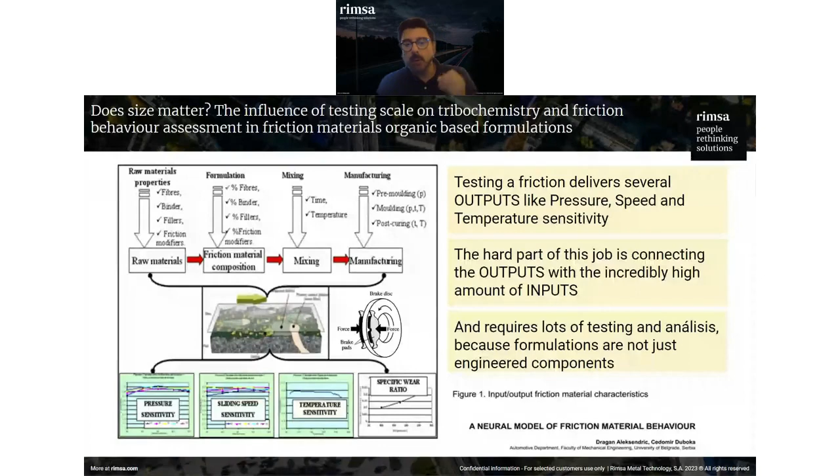Testing this friction material delivers several outputs, like the pressure sensitivity, the sliding speed sensitivity, the temperature sensitivity, the wear ratio. So for coefficient of friction, we want this coefficient of friction to be stable, to be the same in every condition, no matter what the pressure is, no matter the speed, no matter the temperature.

And of course, the hard part of this engineering and scientific work is to connect all this output—which is engineered data—with an incredibly high amount of inputs. On these inputs we have all the raw materials, the friction material composite, the percentage of raw materials we use, the processing conditions and manufacturing conditions, pressure, temperature, finishing, geometry. So it's kind of like a black box when you enter there, and you need a lot of very complex testing, and it's not always easy to understand why things happen, or to answer the question of why something is happening.

This requires a lot of testing and analysis, because these formulations, unfortunately, are not just engineering components. We are not just talking about a component with structural properties that is made of steel and has a geometry. No, unfortunately, this is much more difficult.

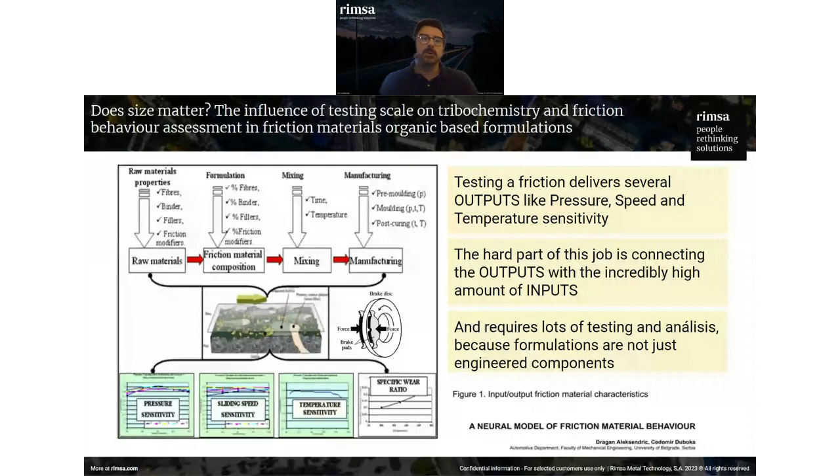During all the evolution of friction materials, the evolution of braking, there have been three drivers, or we may see three drivers right now, that are driving the evolution of friction material. One is the restriction in the use of chemicals, of course. Another is brake emission reduction, and the changes in powertrain due to electrification.

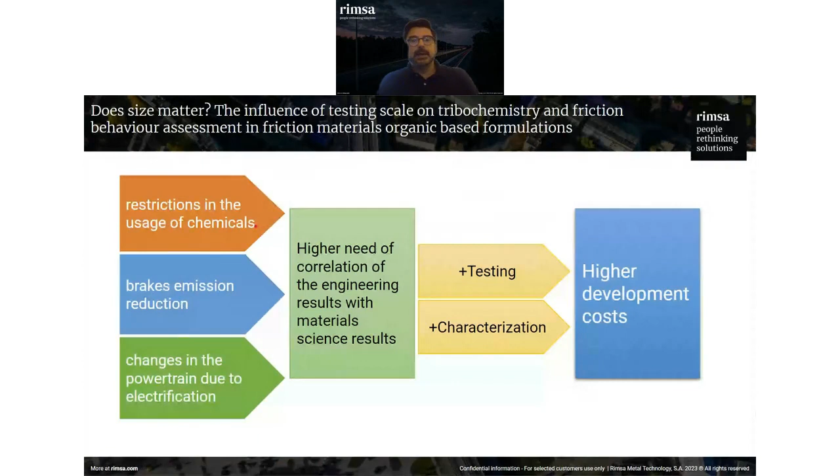All this changes the condition of pressure, of temperature, of speed, and of course, then we are changing some of the inputs. So probably some of the outputs are going to be different. So we need a higher need of correlation between these engineering results and the material science results. This means we need more testing. We need to do not only more testing, but more characterization of what's happened. And this brings higher development cost.

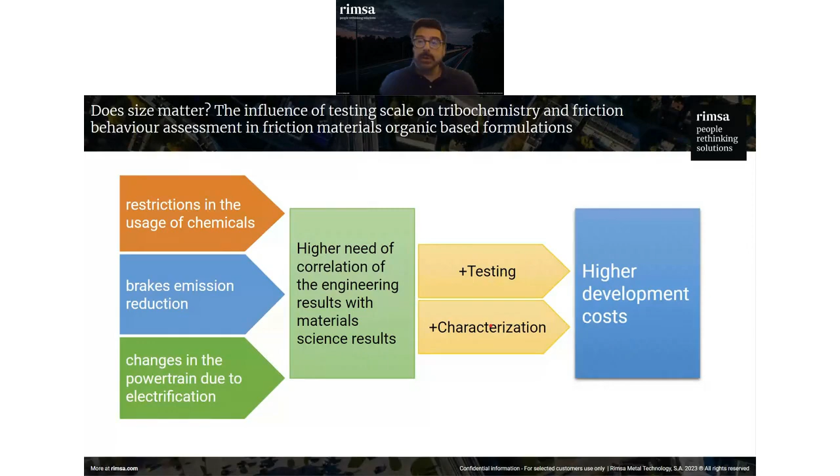In this sector, the big inertia dynamometers are the workhorse of the friction industry, because to get all these outputs with different speeds, with different pressure, with different temperatures, and simulating the inertia of the vehicle, we are trying to stop this kind of equipment that works with a caliper, with the brake pad, and with the rotor, or with the drum. They are the workhorse, but they are expensive, not only to acquire and install, but also to operate, because we need to work with a rotor. There are long tests and so on.

So in the last years, these tribometers, like the one we have, the MFT-5000 from Rtec, are becoming useful tools for R&D.

But we need to understand, and this is very important, how to translate these outputs we get from a tribometer to correlate. If they correlate, the question is, do they correlate with the results we get from a dyno? And this is not only in terms of friction behavior, but also in the tribochemistry. If we are able to reproduce the same tribochemical processes that take place on the surface of a brake pad and a brake rotor - that's why the question of does size matter when thinking about friction and tribochemistry. So today we are trying to give some answers and some clues to this.

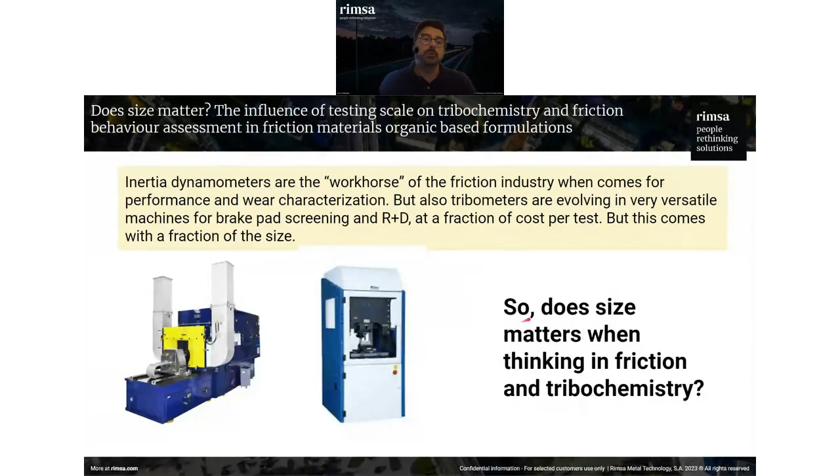This, what you have here, is just an example of what a characterization of a friction material can be. You can see there are different sections. This is a dynamometer test. In this case, it's taken from a J2522 schedule, and you can see how we have different speeds with a fixed pressure, or then we test with different pressures. We test at a specific speed, or we do a number of different stops going at a specific deceleration rate from a specific speed, but increasing the temperature of the rotor, not letting the system cool down.

And we can do this again, increasing the temperature of the rotor and then measuring on these same conditions of characterization, but at different rotor temperatures, or then we can do the efficiency, the effectiveness, at different pressures at this high temperature. As you see, the testing conditions are very complex. The outputs we measure span a wide range of different parameters. So this is important to understand how this correlates.

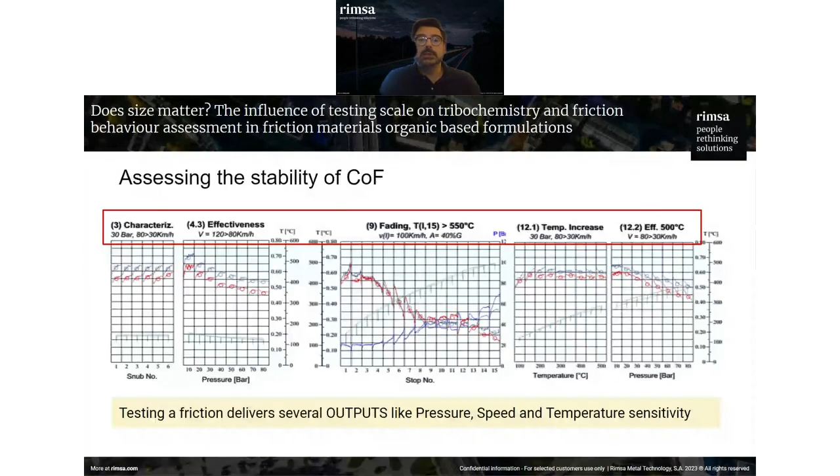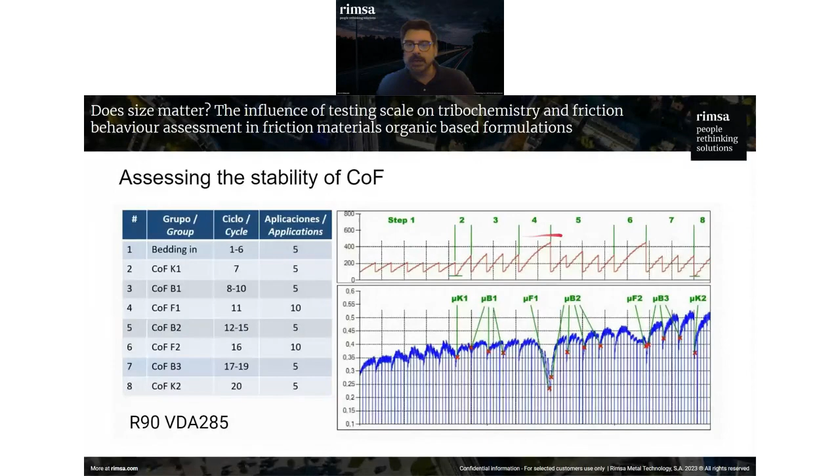In this case, we are going to show initially some results of a much simpler test than this one. Basically it's the R90 VDA 285, which has 8 different sections of testing that go through different speeds, pressures, temperatures, and so on. Here is the profile of the temperature, and this is the response you should have - the response of the coefficient of friction at different temperatures.

Of course, this is very important.

The fact of having not just a pin on disk, but a fully programmable tribometer where we are able to program different speeds, but not only different speeds. We can program different decelerations. So we can simulate the braking, we can simulate the snub, so the reduction of speed, and we can achieve the temperature we need.

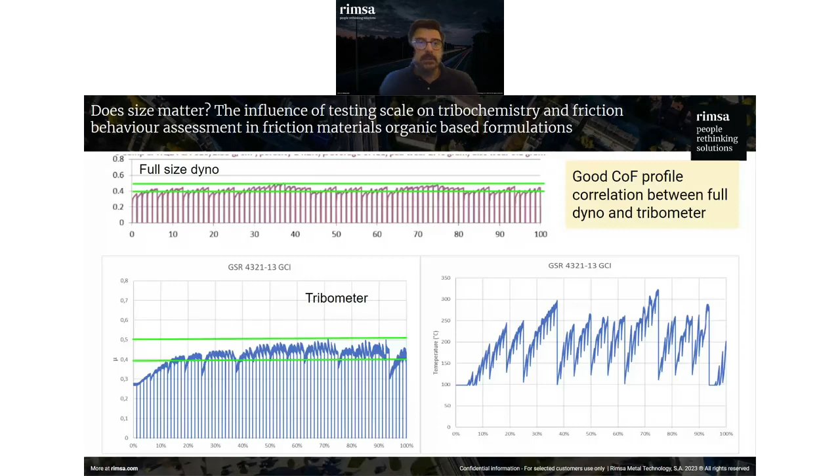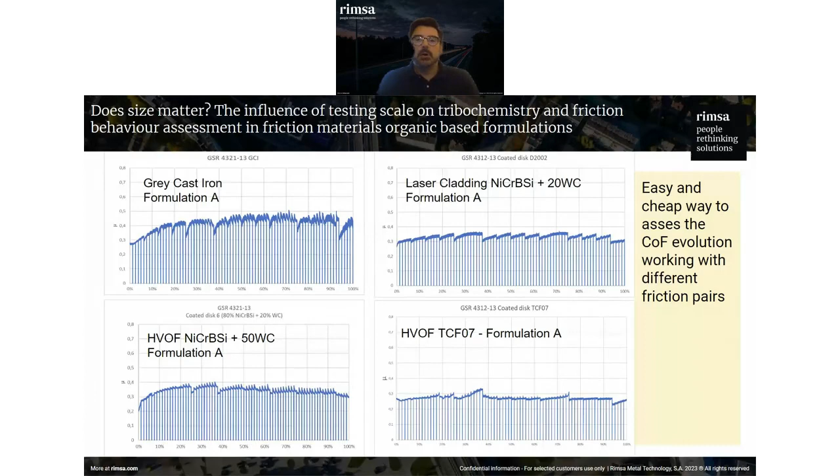Because this change - and you will see later when we talk about tribochemistry - this change, how the surface of the brake pad modifies in every section, correlates with the coefficient of friction we obtain with the engineering data. So this is very important, and having the confidence that we are able to simulate and replicate these coefficient of friction profiles in a tribometer allows us and the friction community to have an initial assessment at a lower cost and a higher speed.

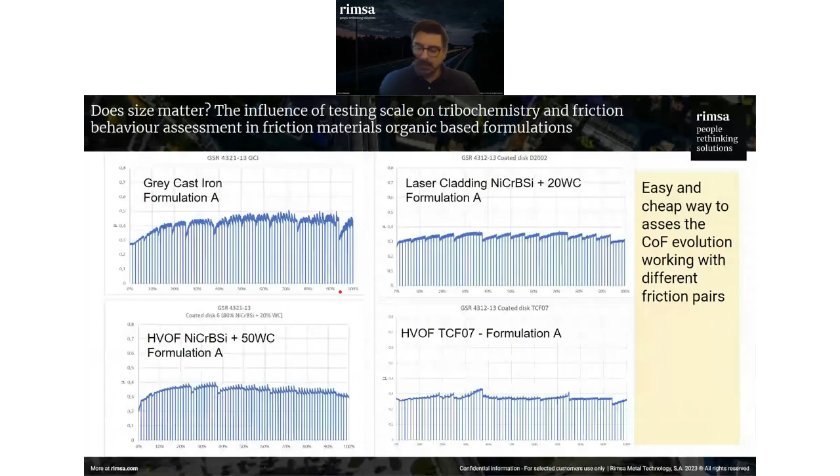So this gives you a lot of flexibility to work with small samples, but having the confidence that the profile you obtain will be close enough to the one you are going to obtain on the dynamometer. And this is the same case if we use a different formulation, or we can compare different formulations with different rotors.

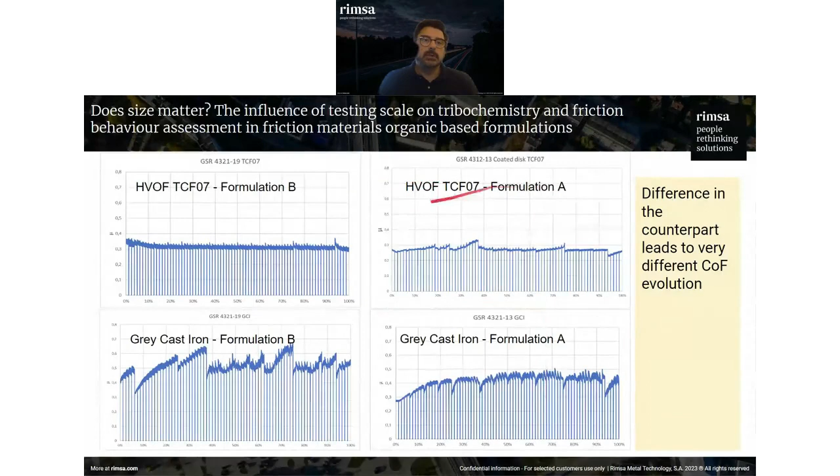We have here a hard-coated rotor with titanium carbide and with a formulation B. And you can see how formulation B with the same rotor behaves in a different way, and how it compares with a gray cast iron. This is completely different - a gray cast iron versus a hard-coated rotor.

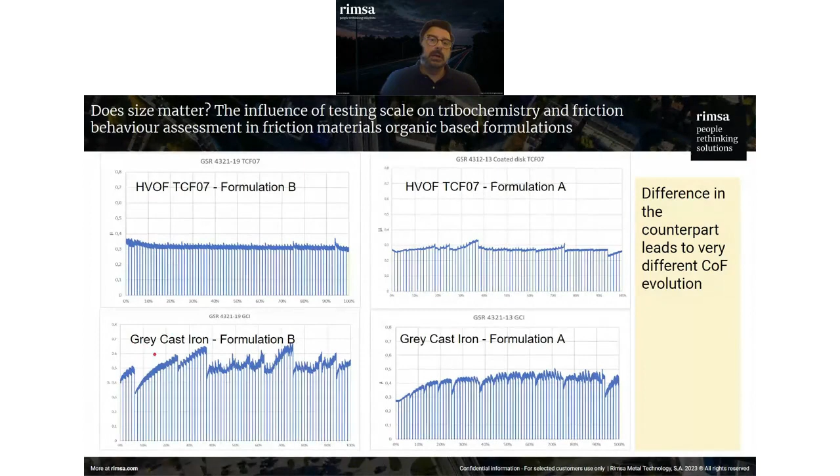This is one of these trends right now, going for emissions. Emissions regulations implementing the reduction of emissions in brake pads is making the industry test and try to implement some coatings on the rotors. Something that may not be working with traditional materials like gray cast iron may be working when you work with coated rotors. So this kind of tool, the tribometer, gives you an easy way to simulate and go through an initial screening.

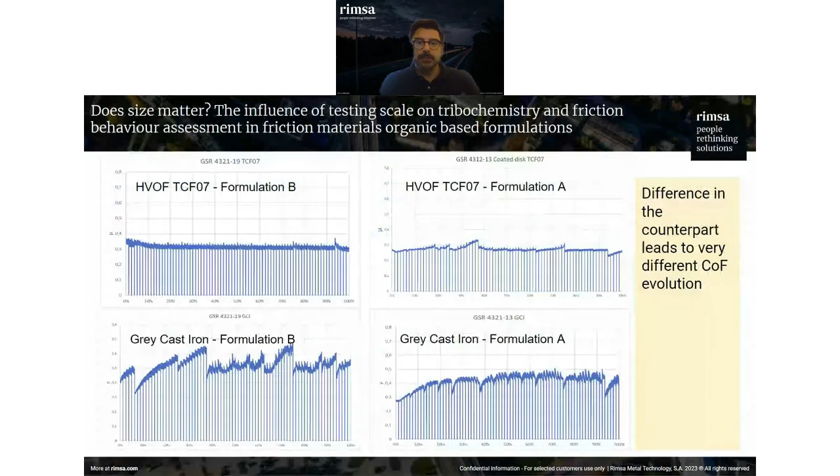These are the engineered results. But the important thing for us with a tribometer and a dynamometer is to understand if we really have the same tribochemistry. And what is tribochemistry?

Tribochemistry relates to the mechanically initiated chemistry - chemical reactions that take place in the boundary layer, and the process involves the formation of a film on the contact surface. This is very important for friction materials. Organic friction materials are commonly like a phenolic resin matrix, a polymer that includes a huge amount of different kinds of additives, minerals, metals, and different charges.

And of course, as you have seen, this is reaching up to 500, up to 600 degrees of temperature on the rotor. So phenolic resin degrades starting from 400 degrees. So we have a lot of phenomena there related to the degradation of the phenolic resin and how the debris generated from this contributes to the coefficient of friction stability.

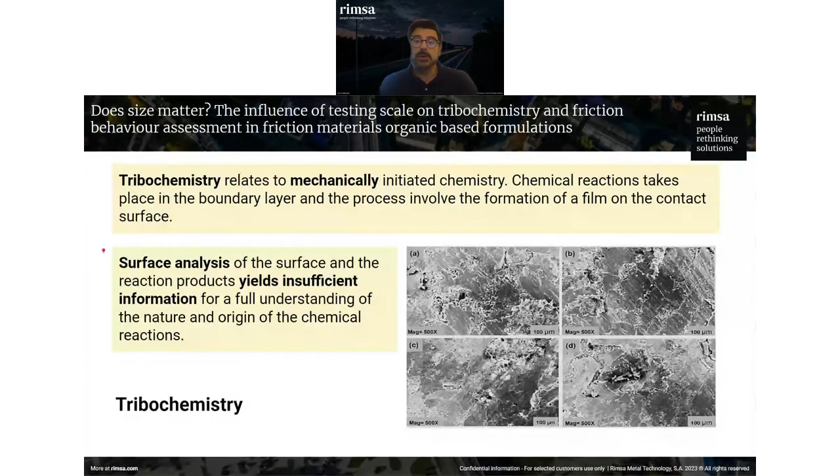So this transfer film - if we take the cross-section of a brake pad and look at the working surface, we usually find this kind of tribofilm. This is related to the tribochemistry, the mechanically induced reactions that take place on the surface of the rotor and the surface of the brake pad, and how this debris is incorporated, kept, or released from the surface of both parts.

So it's very important for the tool we use to assess the coefficient of friction and to do the research that it is able to replicate this tribochemistry in the same conditions, or in close conditions, to the ones we are going to obtain in a big measuring machine or testing machine like a dynamometer, or in the car.

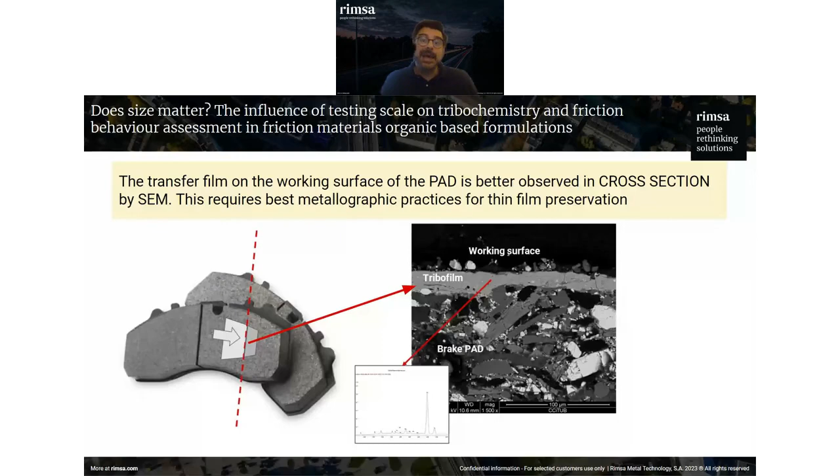What we are going to obtain in the curve. So these results we are going to show you, it goes in this direction. This tribofilm can be of different types.

These are different cross sections of some work we have done, and of course these transfer films basically, when we are working with conventional friction materials and conventional cast iron rotors, usually there are these transfer films that we found can be of 4 types, let's say.

3 of them are based on iron oxide. This iron oxide usually came from the rotor, from the oxidation of the rotor, and then it builds up this transfer film. We can find what we call the loose transfer film, with big particles of iron oxide and other debris that may come from the pad.

We have what we call the compacted transfer film, so with more iron oxide, very small nanometric iron oxide debris, with a very long residence time in the third body layer, and that are stacked here.

This can be the mixed transfer film, so we have some areas that are compacted debris, some areas that are loose debris, and we may have also the possibility of not having any transfer layer on top of the brake pad. Sometimes, depending on the formulas, you don't get this thick or thin transfer film.

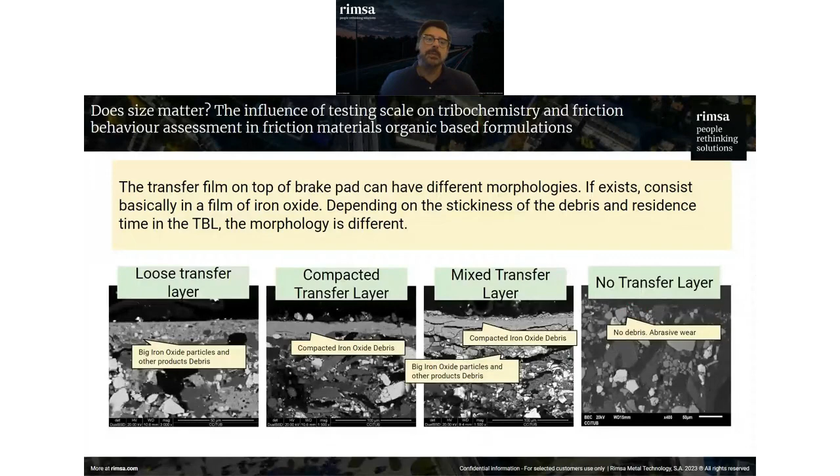So tribochemistry also happens not only on the surface, but also beneath the surface. We may have some additives, some chemicals in the composition, like the phenolic resin, or other additives that may be reactive to the environment where the friction takes place.

In this case, one important additive of this type are the sulfides, for example. Sulfides are used in friction materials to stabilize the coefficient of friction at high temperature and to reduce wear. But you may see here how a sulfide usually reacts with oxygen, and every sulfide has a different temperature of reaction.

In this case, we are showing some results of the iron sulfide, and the iron sulfide reacts with oxygen around 400 degrees. You can see here how after testing on a dynamometer, the signal of sulfur has gone in these first 200 microns beneath the surface.

So to some extent, this iron sulfide has been reacting beneath the working surface and has become iron oxide. If this happens on the dynamometer, it's very important that this also happens on the tribometer, and make sure that this happens on the tribometer, or pin-on-disc, or whatever lab scale tool you use.

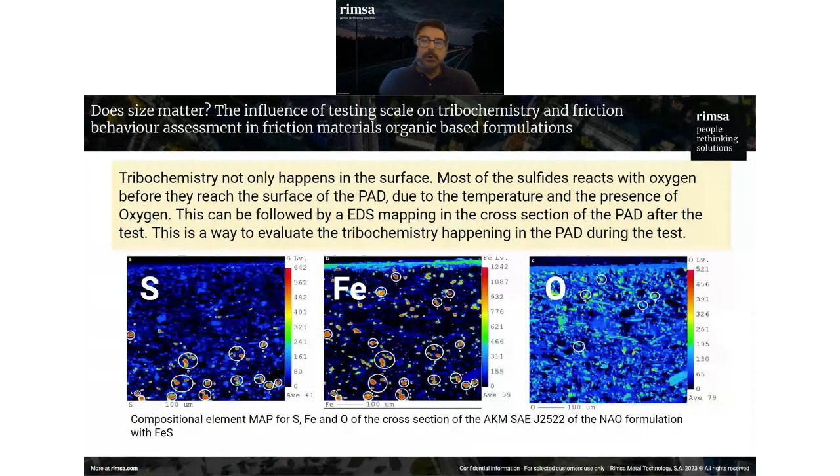To assess a friction material, in order to guarantee that the results we are getting from the coefficient of friction, from the engineering results, are going to be easily correlated with the results we may obtain from a big testing equipment like a dynamometer. So you are going to see a brief comparison with a formula.

In this case, we are going to use the sulfides as a marker to follow up this reactivity beneath the surface or on the surface of the brake pad, and we'll compare what happens in a dynamometer, with a friction material tested in a dynamometer, versus the same friction material tested in a tribometer.

For this, we are going to use 2 different sulfides as a marker. One will be the iron sulfide, and one will be a composite sulfide that is a core of iron sulfide with a coating of tin sulfide.

This is something that happens between 400 and 600 degrees, in the presence of oxygen, of course. Instead, this composite, we call SF05 — you see the TGA, the DSC — the reactivity starts at around 450 degrees with the oxidation of the iron sulfide, takes place up to 700 degrees, and then we have the oxidation of the tin sulfide to tin oxide. So two different oxidation profiles, two different temperatures where this oxidation takes place.

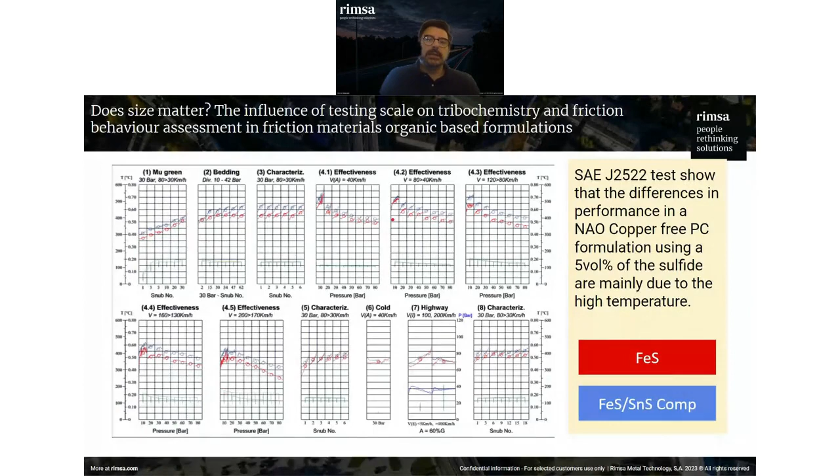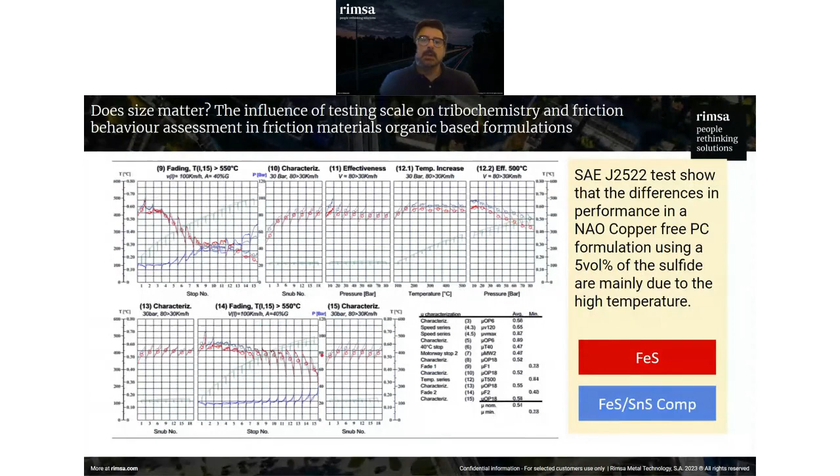We see that the difference in coefficient of friction — these are the results of the full-scale dynamometer, so this is the real test — it's not really different, especially at high temperature. The response of using the iron sulfide or the composite in this particular formula, the engineered results is basically the same. So we have basically the same coefficient of friction.

The difference is if we measure the wear of the brake pad after this test on the dynamometer, we see the wear in millimeters happening at 150 degrees, at 300 degrees, and at 400 degrees. When we use this composite, this iron tin sulfide, we have lower wear at high temperature compared with the pure iron sulfide.

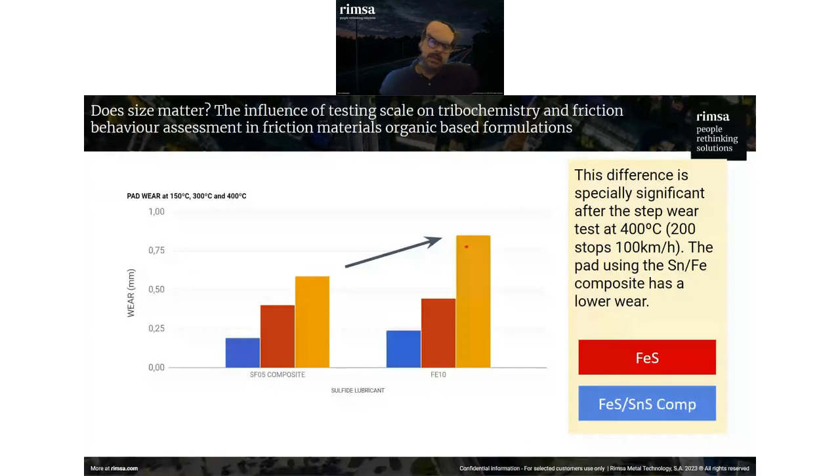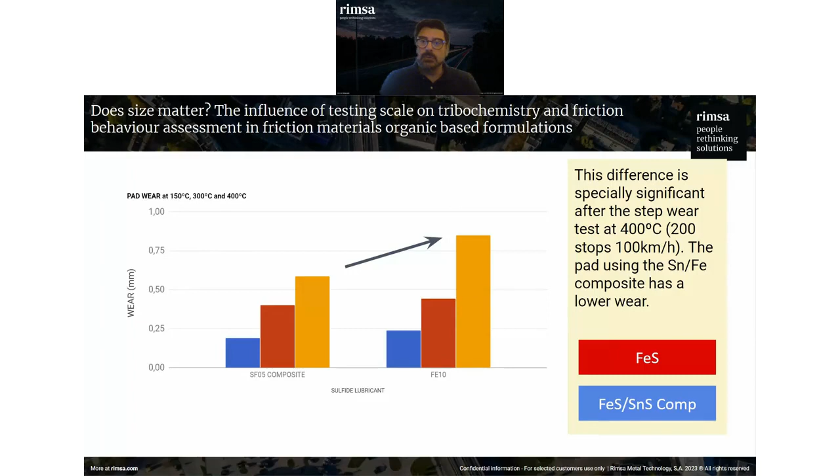When we use this FeS, the wear is higher. Why is the wear higher? That's probably related to this tribochemistry, and is probably related to the oxidation of the iron sulfide at high temperature. We are getting iron oxide, we don't have the iron sulfide anymore at high temperature, so we're not getting this effect of lubrication or wear protection of the sulfide at high temperature.

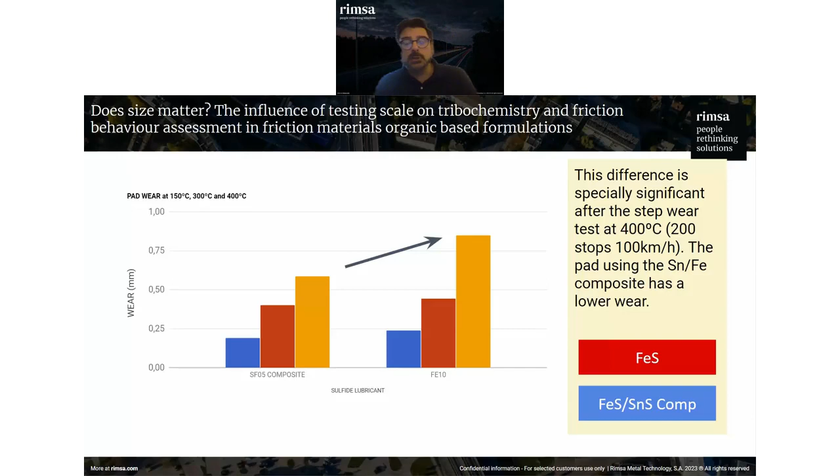But how to assess this, and how can we follow if this is happening in the dynamometer or the tribometer? We have done a simple test to follow that. You are going to see the different charts. Right now, all the red ones are always from the dynamometer and the green ones came from the tribometer.

So we have assessed - sorry, this is a mistake here - this is around 10 square centimeters. This is the brake, the coupons we mount on our MTF. So what you get is 10 square centimeters of friction material that are tested against a rotor that in this case is gray cast iron, the same that we will use in the dynamometer.

And what we have done is a process of 200 stops at each temperature - in this case 150, 300, 400 degrees - under conditions of 30 bars of pressure, going from a speed of 100 kilometers per hour to 0 kilometers per hour, a complete stop, and a deceleration rate of 0.4 g.

And we are going to see how the coefficient of friction evolves and the tribochemistry evolves, both in the dynamometer and the tribometer. So basically, this is a summary of what we have gotten in the four tests.

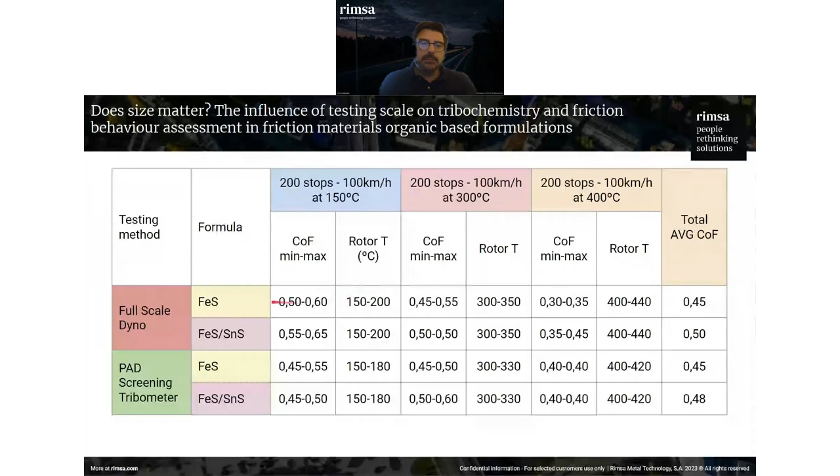So we measure basically the coefficient of friction and the temperature we have achieved at each level. You can see on the full-scale dyno this is the rotor temperature, the temperature on the counterpart, on the cast iron rotor surface. So we have achieved slightly different coefficients of friction and slightly different temperatures, but they are close enough to be considered in the same range.

So the total average coefficient of friction - we see the same trend. The average coefficient of friction increases a little bit when using the composite sulfide compared with the iron sulfide, and this is the same case both in the full-scale dyno and the pad screening tribometer.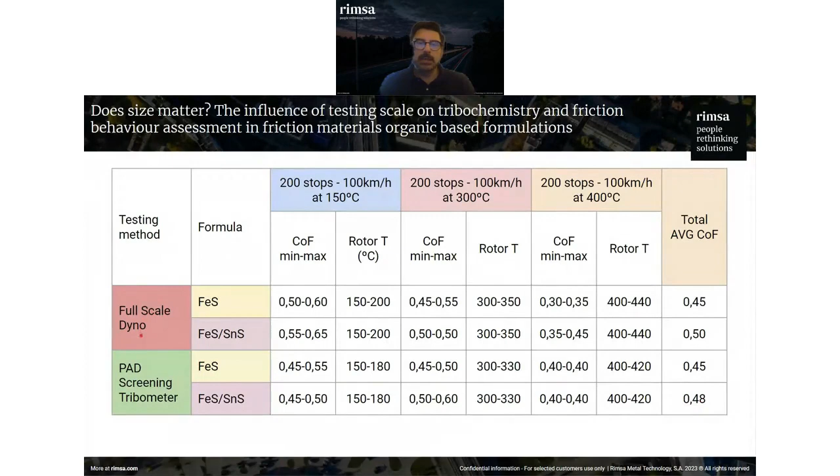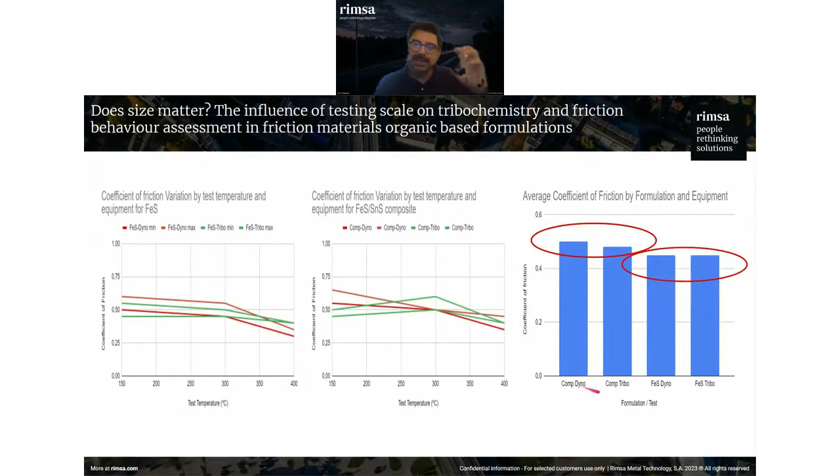You will see here in a more visual way, this is the evolution of the coefficient of friction in the dyno and in green in the tribometer, and here is the average of the coefficient for each temperature. So we can see that in the dynamometer, when we compare the different sulfides, we are getting the same trend as in the tribometer.

Okay, and if we go into the detail of how the coefficient of friction of the friction material and the rotor evolves, we will compare here the results in red of the dynamometer, the full-scale dyno, with the results in green of the coefficient of friction evolution on the tribometer.

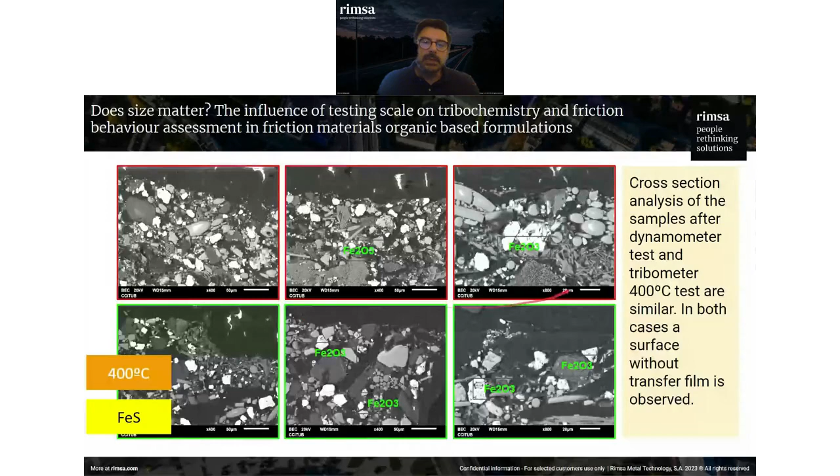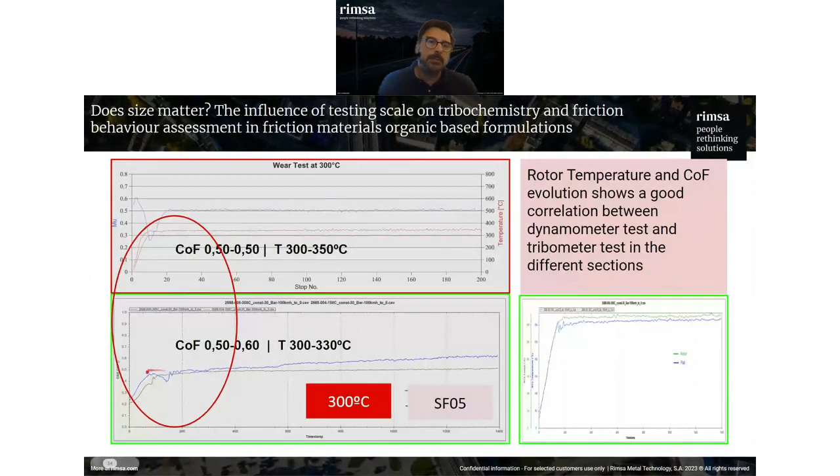So we are able to replicate this oxidation in the same way in the dynamometer and the tribometer. If we see the results with the composite of iron and tin sulfide at 150 degrees from the dynamometer and the tribometer, we have a close profile of the evolution of the coefficient of friction. At 300 degrees we see a difference, but still we have this small drop - here the drop is bigger, but then the coefficient of friction is pretty close. And at 400 degrees we have a slight difference in this initial area. With the tin sulfide and iron sulfide, the correlation is not as pronounced or as clear as with iron sulfide alone, but still we get a close result.

And if we go to analyze the elemental map distribution on the surface after the dynamometer or the tribometer, we see here that there is no oxidation, neither on the tin sulfide, nor on the dynamometer or the tribometer. If we analyze this with SEM, we find that the particles of the sulfides are still giving the signal of tin sulfide and iron sulfide, both in the cross section after the full scale dyno or the tribometer.

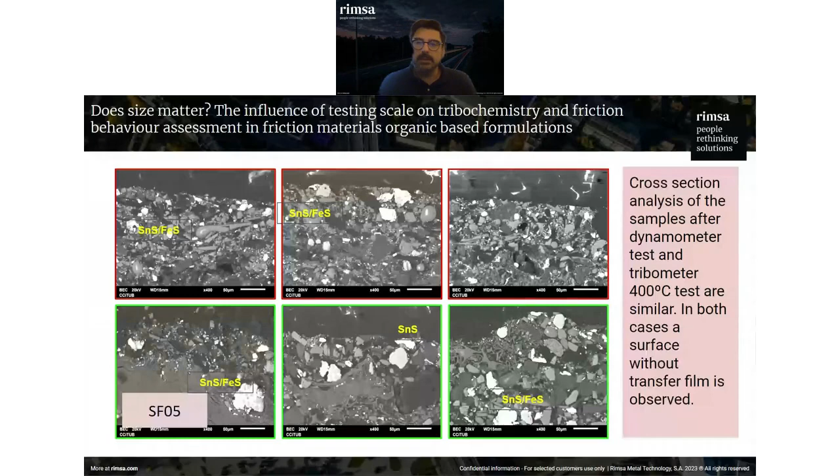So we can correlate. We can say that we are obtaining the same coefficient of friction profile because we are sure that we are keeping the same tribochemistry. We are able to replicate this tribochemistry that takes place beneath the surface.

As a summary of these results, with the full scale dyno, neither in the iron sulfide formula nor in the iron sulfide tin sulfide formula do we have any pad transfer film type, because this formula doesn't generate a transfer film. And the oxidation, after this 400 degree test, the oxidation depth achieved by the iron sulfide is around 200 microns, both in the full scale dyno and the pad screening tribometer. We don't have any oxidation of the composite of iron sulfide and tin sulfide, neither on the full scale dyno nor on the tribometer.

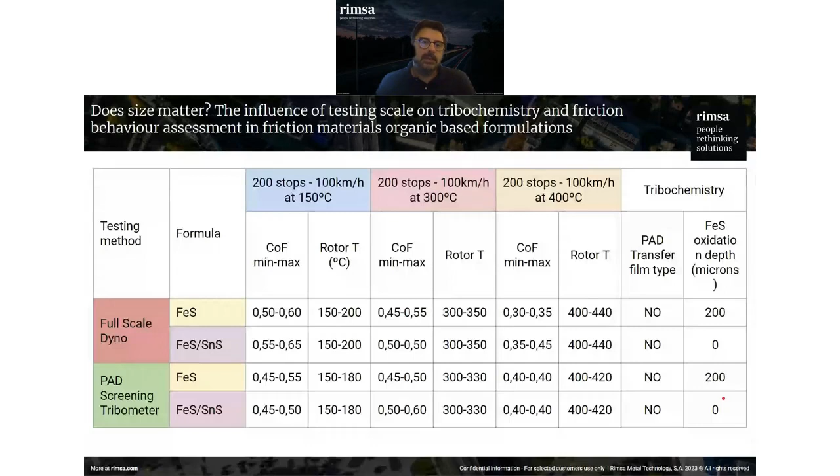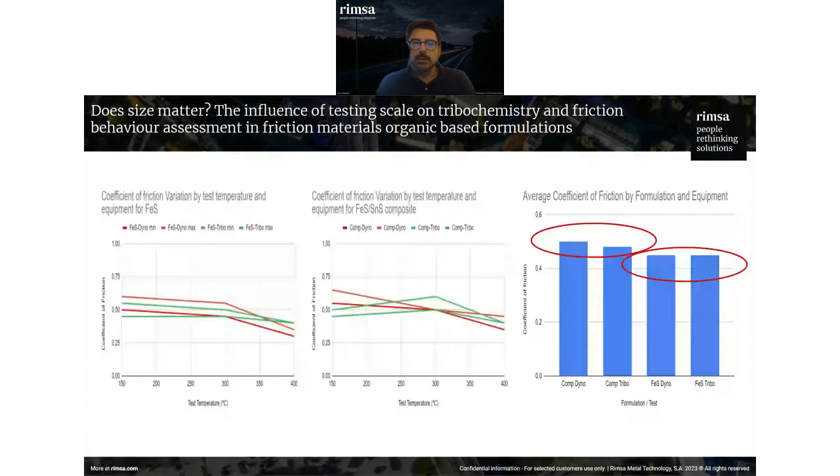Remember that the oxidation of the iron sulfide in the composite, because of the structure, was not happening very fast at 400 to 600 degrees, but started at a higher temperature and ended at a much higher temperature.

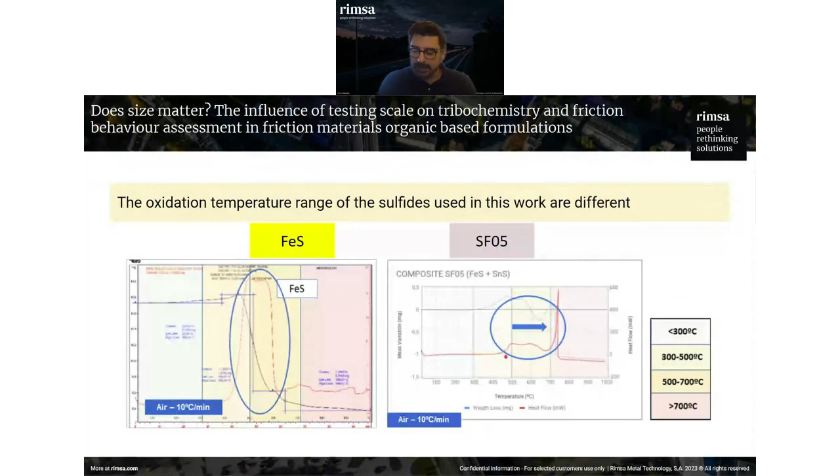And with this, we are going to finish, and we are going to go to the main conclusions about this: if the size of testing is important for friction materials.

It's true that testing, as you have seen, involves an incredible amount of inputs we may have, and the outputs we need to measure in very different conditions. This makes testing a friction material still very much required to validate how a friction pair behaves in working conditions. And this increases the development cost, especially when radical changes in formulation happen.

If we are in a transition, like electrical vehicles that work in different temperature conditions or with different corrosion behavior, it increases the needs of testing.

So in this scenario, pad screening tribometers are developing themselves as a new tool to reduce testing cost and speed up development cycles, because of their low running costs and easy setup. A test that takes hours or days in a full dynamometer, because you need to cool down in each session, can be sped up in a tribometer. So all the mass involved in the testing and the cycle is much shorter in order to run the cycle.

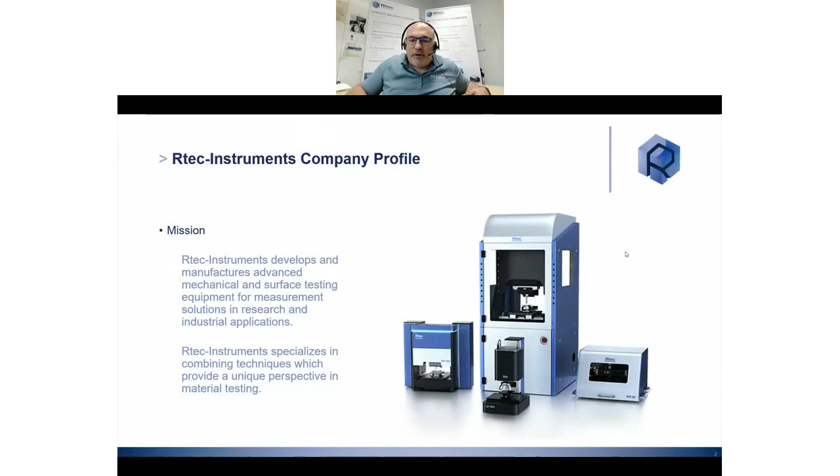Rtec is a US-based company, and we are developing and manufacturing advanced mechanical and surface testing instruments like scratch, tribo, and two roller testers. I will show you later some slides. We are a US-based company in San Jose. I'm in fact based in Switzerland on the European base of Rtec. We have offices in India, China, and Japan, and we use sales partners.

We are proposing multi-functionality tools. What we want to do is offer the possibility with our tool not to do only one analysis, but to combine a lot of technology and measurement characterization. In the past we started with wear and friction by tribology. After that we had scratch testing, we added indentation, and also a 3D microscope linked to the system for roughness and topography. We also added spectral reflectance for coating thickness and optical constant. All these tests can be combined on the same tool at the same time, and with this product we can learn much more than only doing one test.

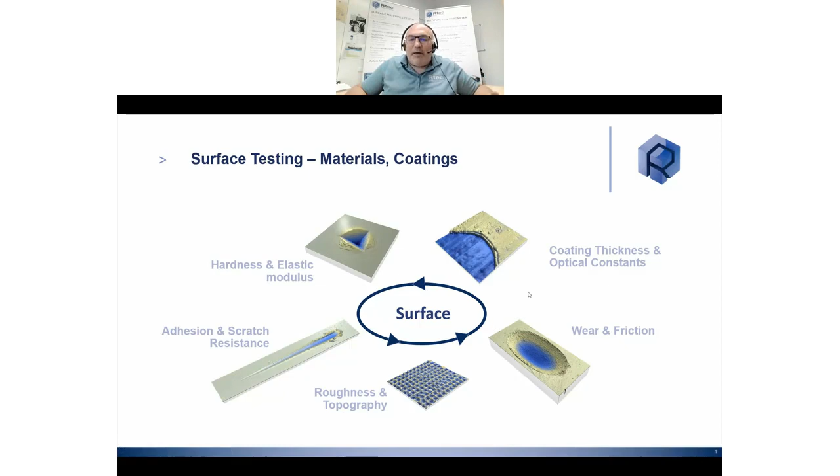The main product line of Rtec instrument is multifunctional tribometer for friction and wear. We have three different types of instruments: MFT 5000, 2000, and 3000, depending on load and options. We have an SMT 5000 for scratch and indentation testing for hardness, elastic modulus, adhesion, and scratch resistance. We also have a full range of fretting testers, from 5 microns up to 2.8 millimeters, with frequency going up to 300 hertz, mostly for small displacement. As I mentioned, we are also developing our own universal profilometer head to analyze all our data and surfaces.

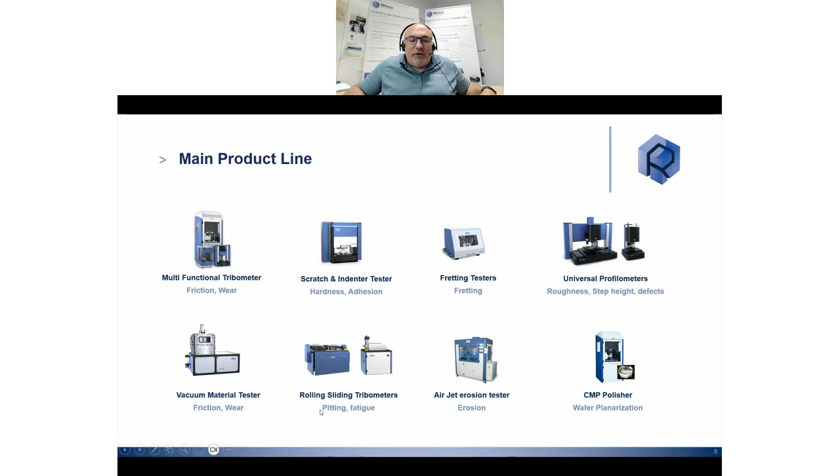We have a vacuum materials tester. We can do tribology, tension, and scratch testing in vacuum, but we have the same tool for high pressure, for compressor applications for example. We have rolling and sliding tribometers, two roller and three roller, for pitting, fatigue, etc. We also have an air jet erosion tester and a CMP polisher.

The main topic today was the multifunctional tribometer, so I'll move fast through the MFT. We propose a wide range of tribometers, and with our tool we can apply from less than 1 milliNewton up to 10,000 Newton with our MFT 5000. We have different motors, harmonic drive, fast motors going from 0.001 RPM to 10,000 RPM. What is very important, especially for brake testing, we now have a different motor going up to 60 Newton meters at a speed of 2,300 RPM, offering a lot of possibility to test with high torque. All our tribometers are very modular — on the same system we can use rotary drive, reciprocating, block on ring, disc on disc, ring on ring, and a lot of other configurations.

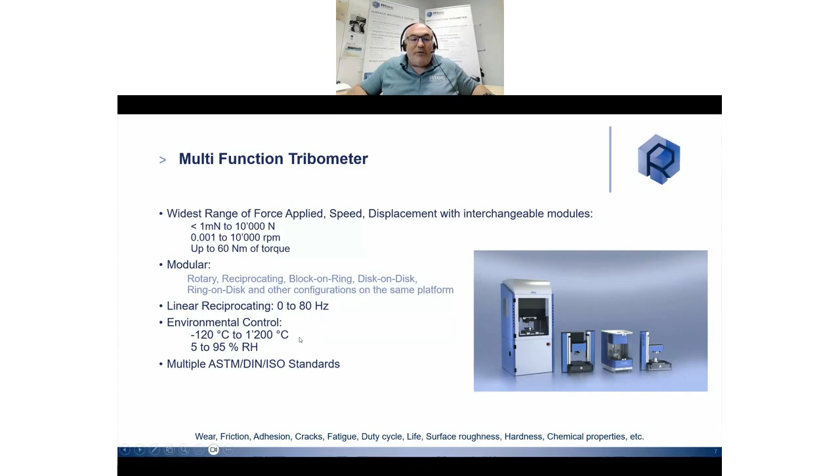We have a linear reciprocating going from 0 to 80 hertz of frequency. Naturally, a lot of environmental control for minus 120, and we can go up to 1,200 degrees. And we have also some humidity chamber to go from 5 to 95% of humidity.

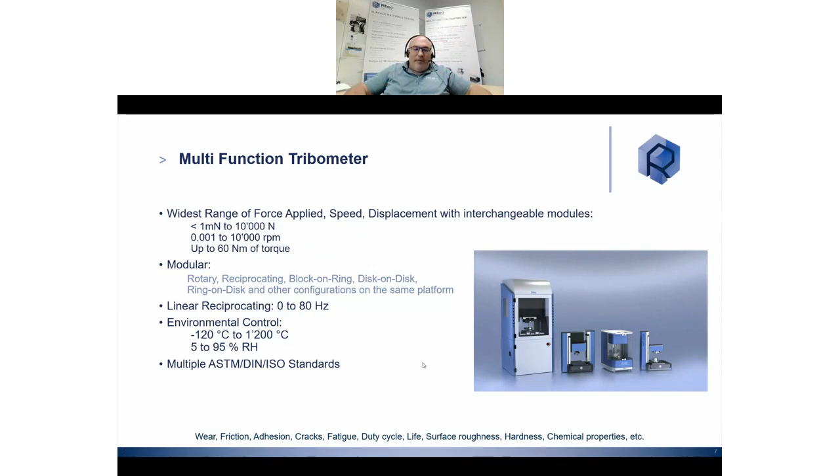Naturally, all the tool, and Carlos explained well before about the SAE standard, we follow a lot of multiple ISO, ASTM, and DIN standard. We choose a base, MFT 5000, 3000, 2000, depending on the final load we want to use and all the mode. After we choose the machine, maybe we have a rotary, linear, long stroke, block on ring, fretting, or upper rotary drive. We choose the environmental condition from salt spray 500, 1000, minus 120, minus 60, or 1200. And we combine all the options on the same tool. What is also very important is the fact you can start with one option and add options every year, every 2 years, every 5 years, in order to have more and more capability with your tool.

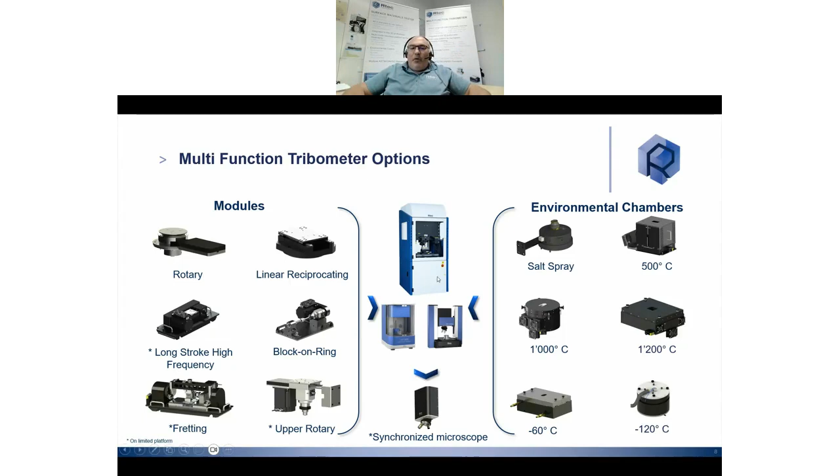The idea to have something new with tribology was the fact we combined 3D profilometry with our tool. And for example, here we have a reciprocating wear test.

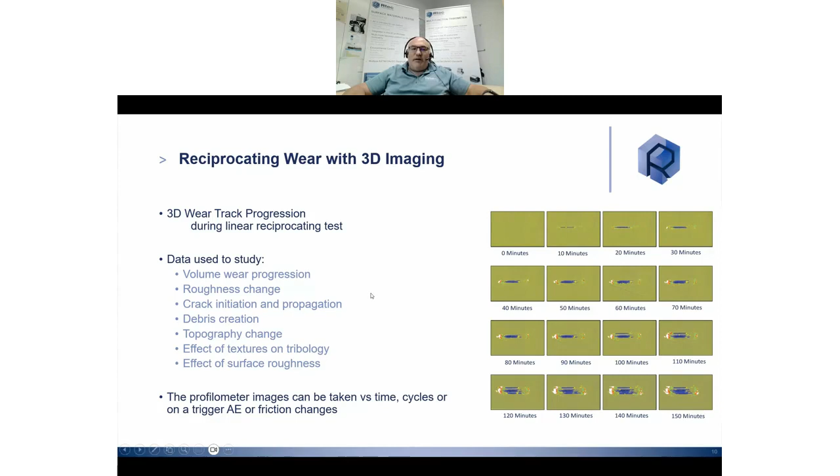We are testing some steel materials, and we decide to take a picture of the stroke every 10 minutes. And you see 0 minute, 10, 20, 30, and we took an image automatically synchronized. It means you start with your linear reciprocating test, you move back to the microscope, you come back and you restart the test. With a 150-minute example here, we can measure the volume wear progression, we can measure the roughness change, we can check if we have crack initiation, debris creation, topography change. It gives you much more possibility than basically doing 150 minutes directly and analyzing at the end the full test.

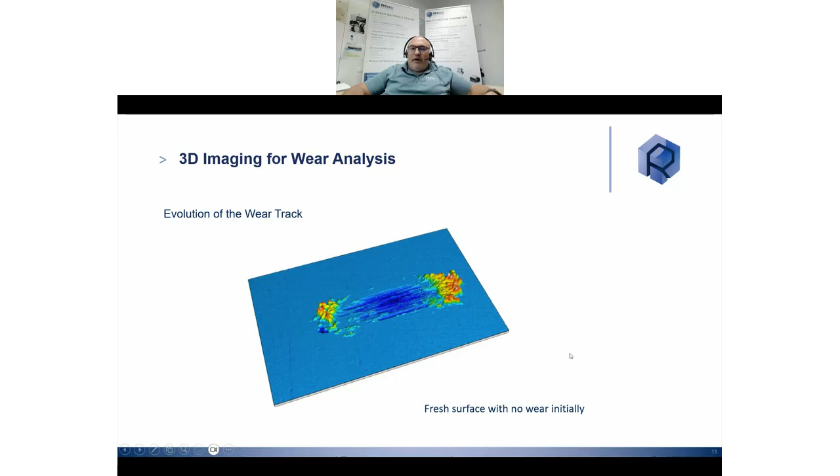You see here the increase of wear during the 150 minutes, and with the debris, with the large wear, from where it's coming, do we have hard particles? We can check really the lifetime. We can do multiple profiles in order to understand the wear rate every 10 minutes and combine it on a curve to have a really related test for wear rate.

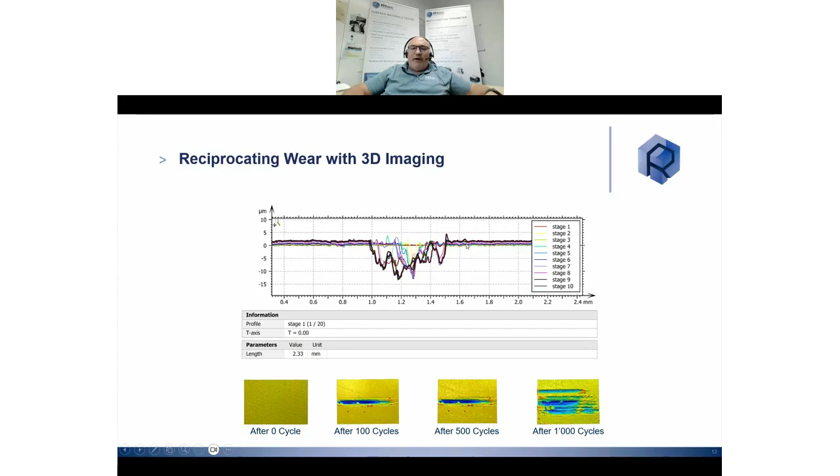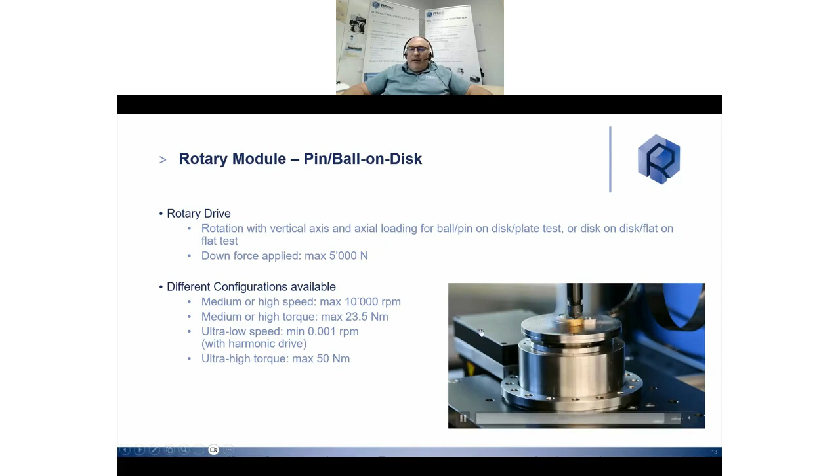As I tell you, Carlos showed a demonstration with special pads with 3 coupons on the rotary drive, but we can also do basic pin on disc, ball on disc. We have a rotary motor. We can go to high speed. We can go to 5,000 Newton if needed. We have high torque, slow speed, and we are doing this type of test quite often.

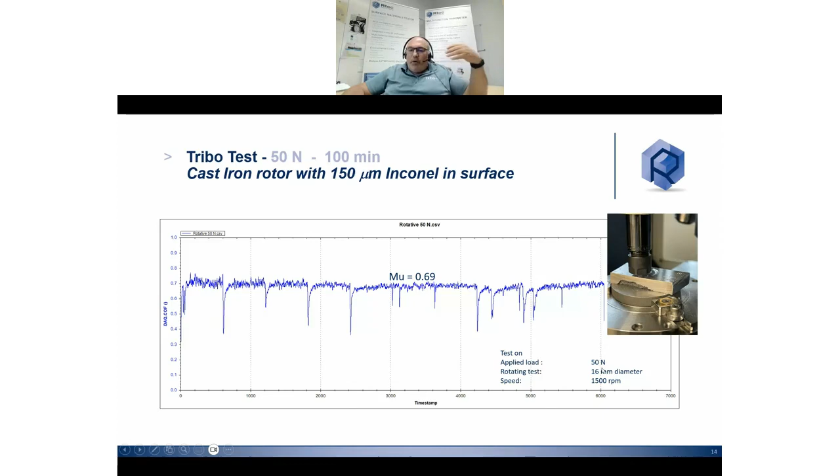As an example, you see here it's a cast iron rotor with 150 micron of Inconel on the surface. We cut really a rotor. In fact, we fix it on a metal plate and we are doing our rotation. And during the rotation, you see we have some decrease of friction every time - it's when we cool down because we move to the microscope. We have a friction coefficient at 0.69. We apply 50 Newton with a 16 millimeter diameter. It's really ball on disc on this type of rotor with a speed of 1,500 RPM.

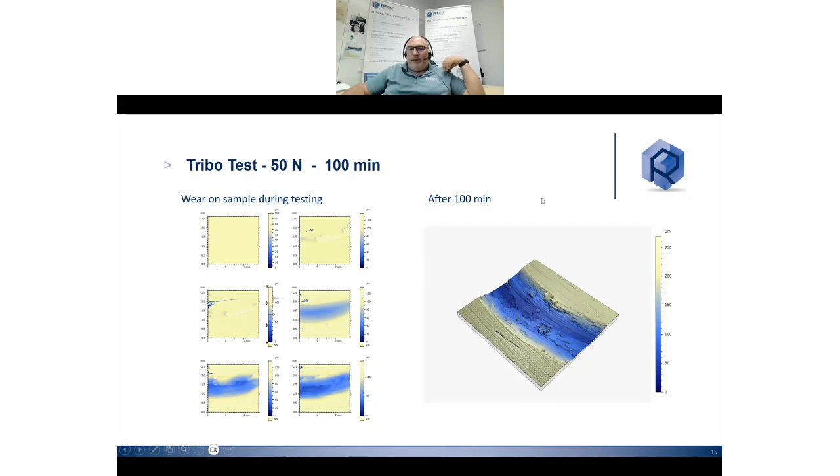And here you see clearly the increase of wear during the test and the final wear at the end of the test. And this one helps you to understand clearly what happened in rotary mode.

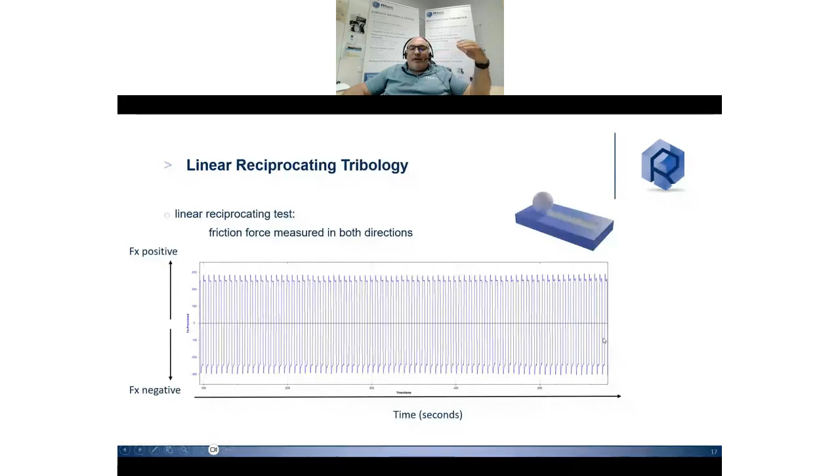And this one, again, if I show you a small application, if we are doing linear, we measure with linear reciprocating both directions, meaning the friction on positive and friction on negative. And it allows us to do naturally some curves of the displacement in function of the friction.

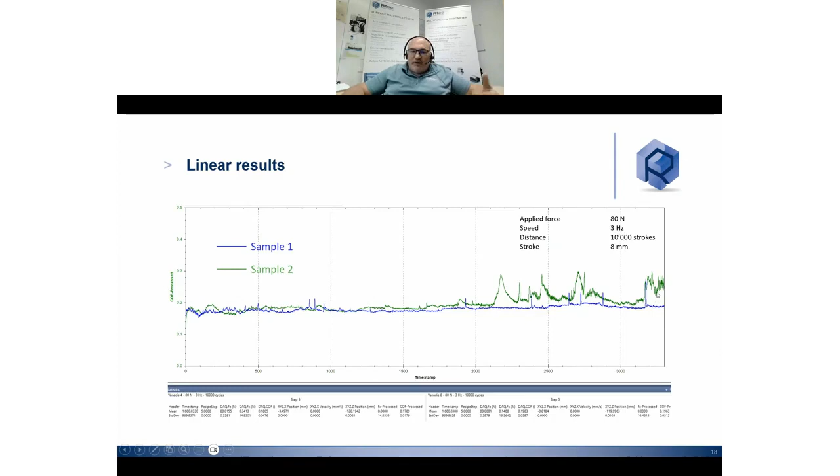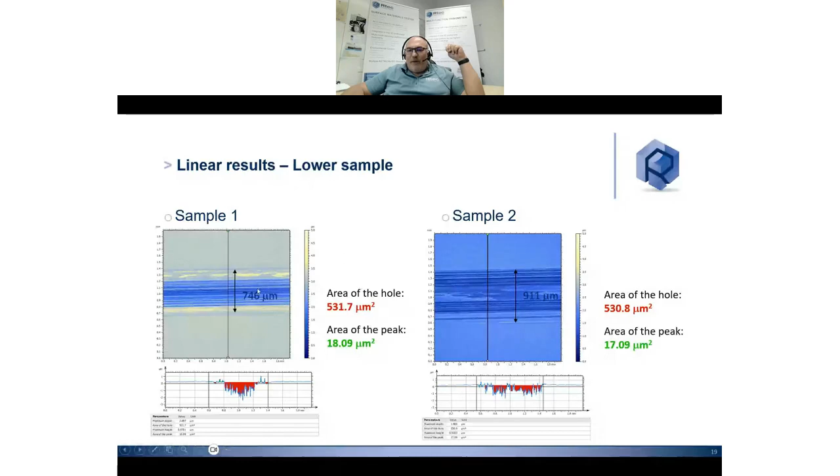Again, after the end of the test, we just scan the surface. We can compare. You see here the two materials have the same trend, except maybe at the end, the green one, sample 2, has more friction. But when you compare the wear scar at the end of the test, you see we damage much more in terms of depth on sample 1, but much wider on sample 2, simply because it's harder and we break much more, we wear much more the ball during the test.

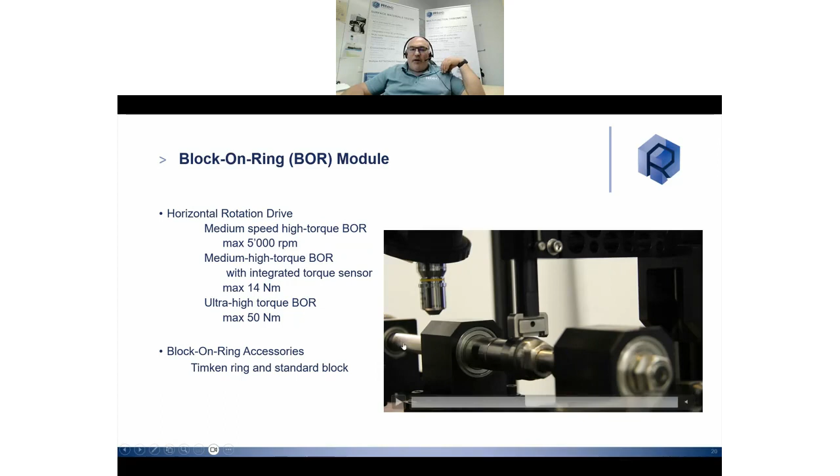We can also add the option for block on ring, which is another direction - we turn horizontally and apply a block. We can go up to 5,000 RPM, with a torque inside the motor of up to maximum 50 Newton meter.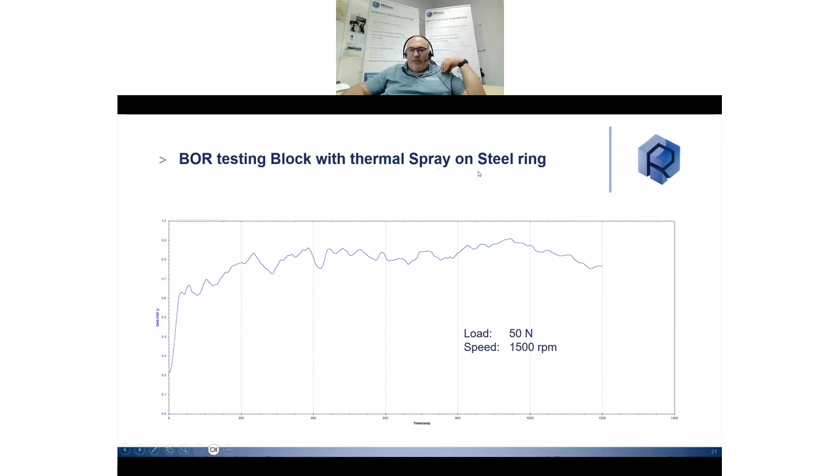Again, some curves showing the friction as a function of time on a thermal spray on steel ring with 50 Newton load. A big advantage of our MFT 5000 is the possibility to put an upper rotary module.

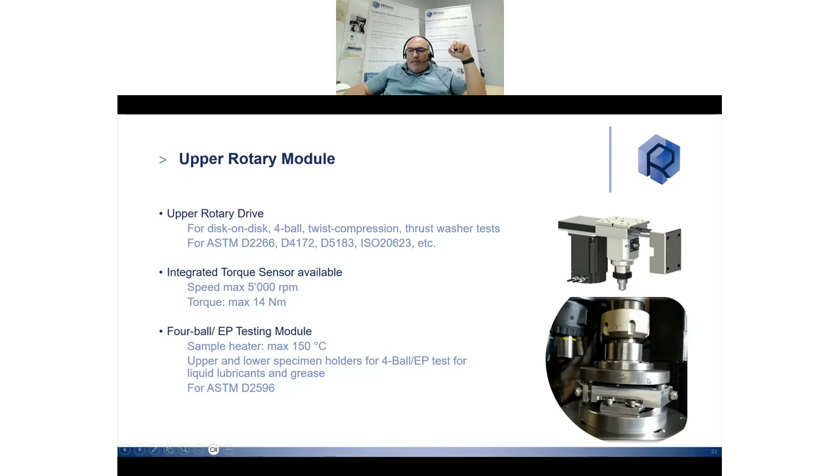We are really unique in this functionality. With an upper rotary drive, we can do disc on disc, 4-ball, twist compression, thrust washer, a lot of testing. We can go up to 5,000 RPM with a max torque of 14 Newton meter. The idea is to block the lower part in order to control differently the temperature environment.

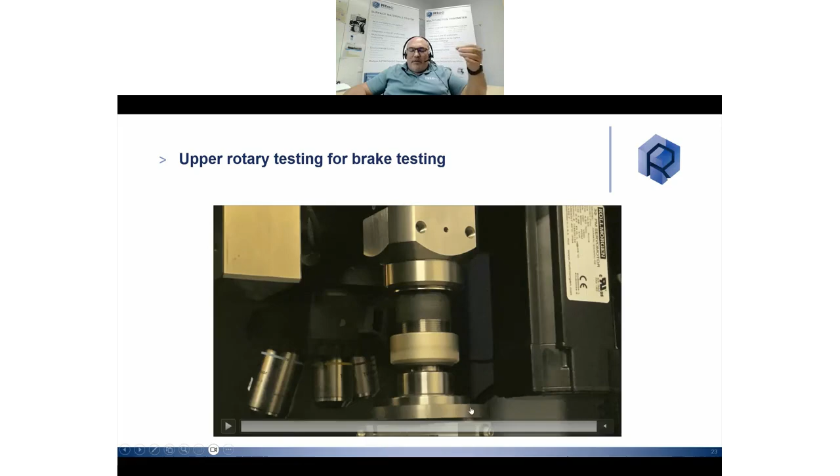You see a small video: the upper drive is turning, it's a rotor, and we press on the brake coupon fixed on the lower part. Automatically, we move to the microscope, scan the surface, come back, and restart our test. Fixing the brake pads on the lower part allows you to analyze much more deeply the coupon during the test.

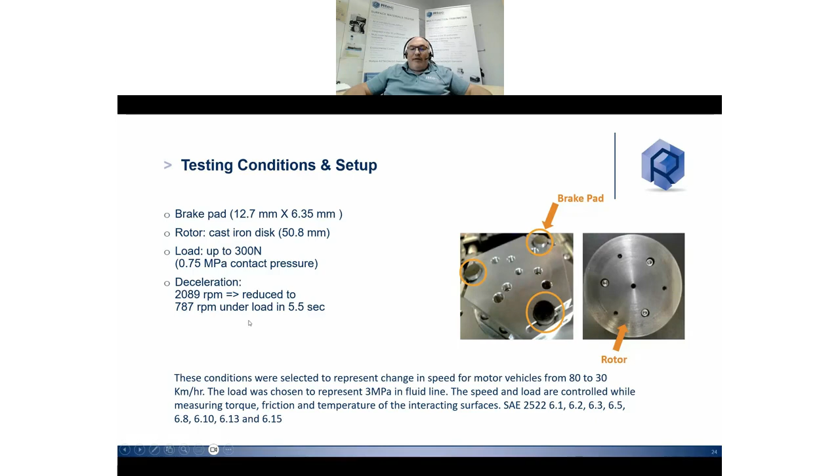Here is a test we did with a coupon of 6.35 millimeter diameter, a cast iron disc. We go up to 300 Newton as the diameter of the brake pads was a little smaller, and we reduce from 2089 RPM to 787 - a deceleration from 80 to 30 kilometers per hour - in order to understand what happened with the materials.

At the beginning we don't have so much defect, but it increases during the test - we are removing material and changing the topography of the sample. We can do that because we have the upper rotary drive linked with a 3D microscope.

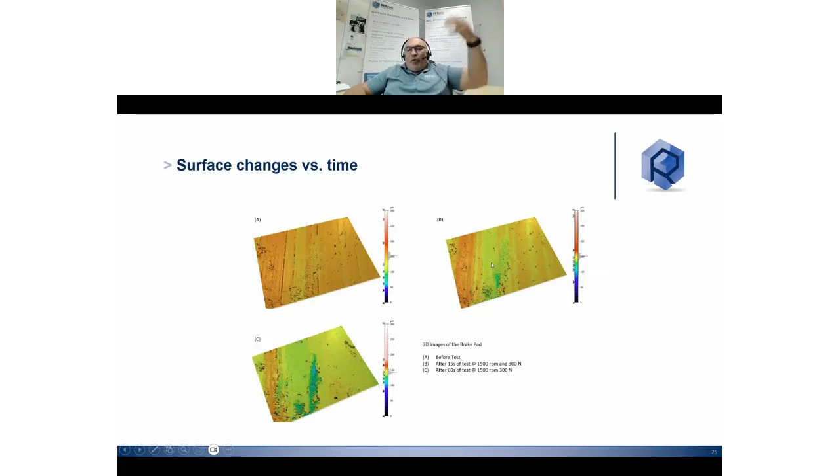We also have an important possibility: the ability to scratch with our head or with our upper loading cell. We can do nano, micro, macro scratch testing, and we can add sensors like acoustic emission, electric contact resistance, or temperature sensor.

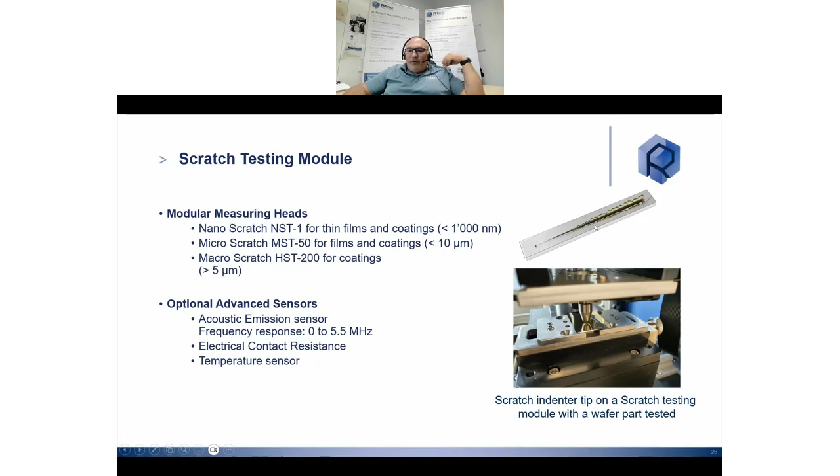But you can also do scratch hardness testing. With scratch hardness, you scratch at a constant load and measure the width of the scratch. If you divide the load by the residual width, you get, following ASTM G171, the scratch hardness. It's a direct comparison with Vickers hardness, except it's much more statistical since it's not measured at one point. Here's an example - a 10 millimeter scratch.

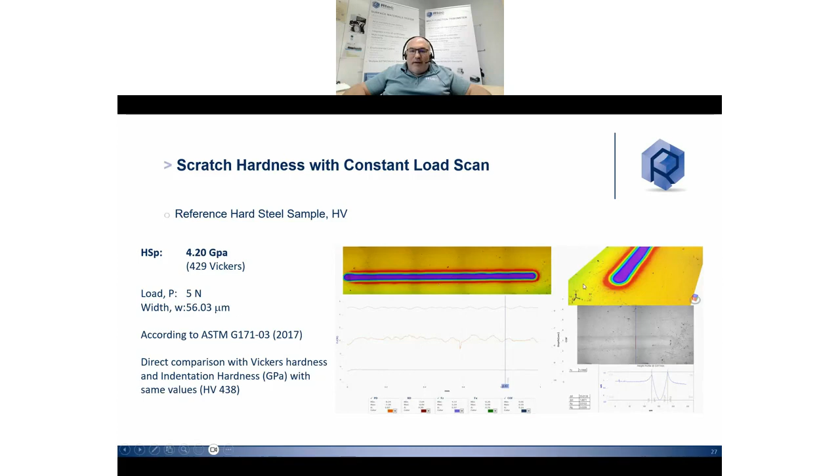We also use scratch testing at very high loads, and this is very important - we don't have so much limit on scratch, and we can scratch up to 500 Newton if needed. This is sometimes very important if you want to scratch a tribofilm on your brake rotor.

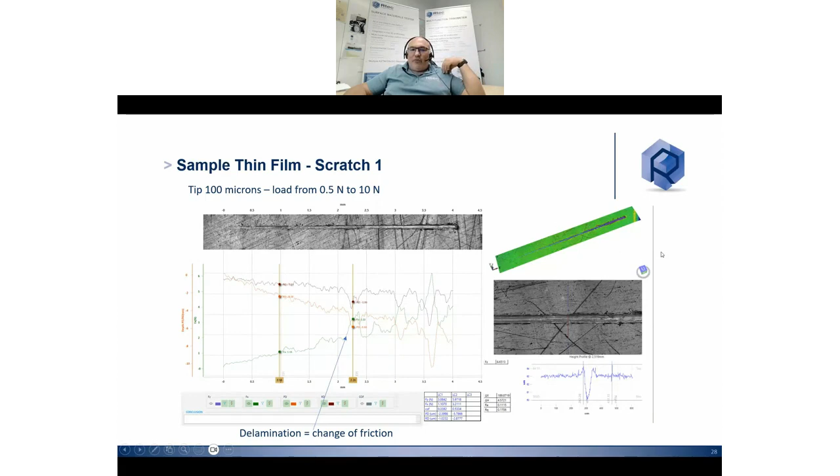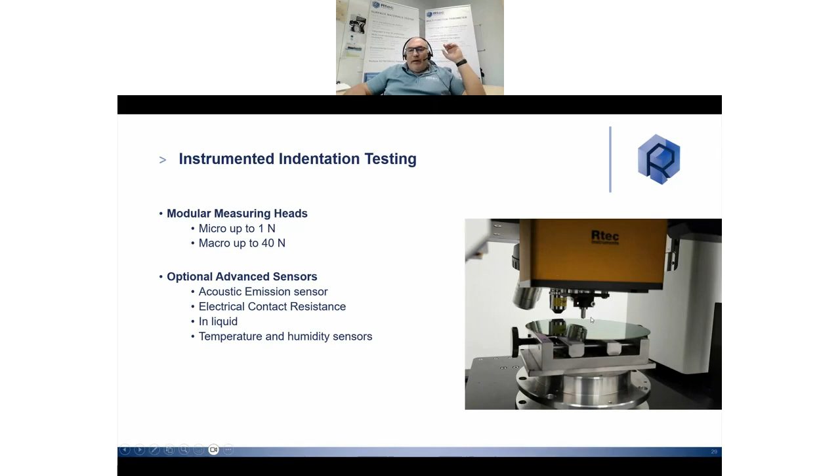To finish, the last possibility is to directly combine with an instrumented indentation head with micro or macro head. Here we fix a Berkovich or Vickers indenter, and we're able to directly measure after the test the hardness HIT, the standard elastic modulus EIT, and finally you see the superposition of the curves we analyze, the contact point, and the statistics between indents and the values we have.

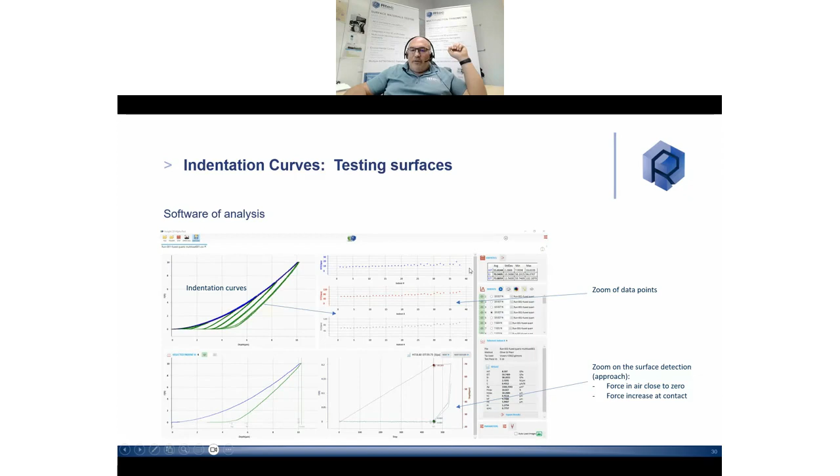We can always move back to the 3D microscope and analyze the shape of the indentation to check if we have cracks or deformation.

I think for the MFT 5000, it's good for today.